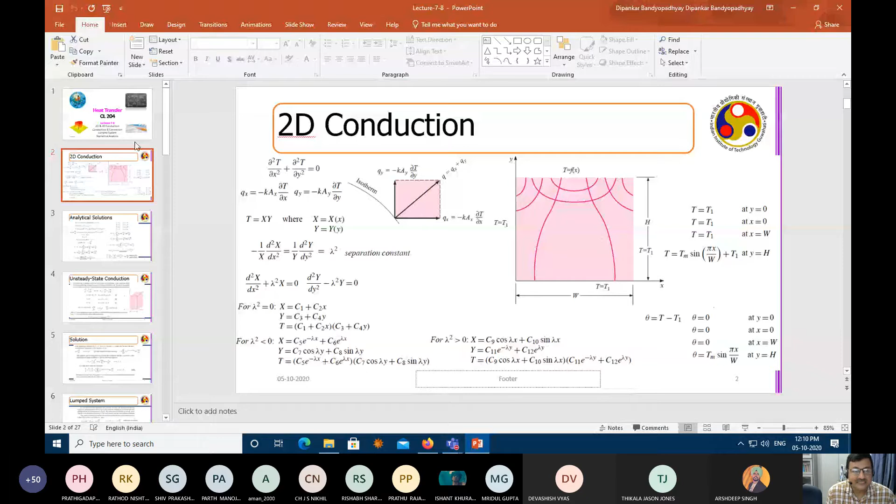Great. So let us start today's lecture. Let me recap the part, because this is a very tricky part of heat transfer. This is the way most of the heat transfer modeling started. You understand that if I'm really looking for an engineering problem, I need to first visualize the problem. Then I have to mold it towards a mathematical model. Then I have to solve that mathematical model, in the forms of equations and unknowns. And then when I'm able to establish the unknowns, I will apply that knowledge for the engineering calculations.

Okay. So what is this problem? You have a slab, and this is a kind of 2D conduction slab. Say suppose there is a heat transfer taking place through this slab. What is the condition that we have applied? This is the width of the slab, this is the height of the slab. The temperature here is T1, the temperature here is T1, the temperature here is T1. But here the temperature is a function of x. This type of system happens in many situations.

Like, say, suppose you have a microprocessor here. When the computer is turned off, the temperature of the microprocessor is at room temperature. But when it is doing a very simple calculation, the temperature is a little more. When it is doing a very heavy calculation, maybe the temperature is exponentially going up. So I say that the temperature at this place is a function of something like this, which is a function of x in this direction.

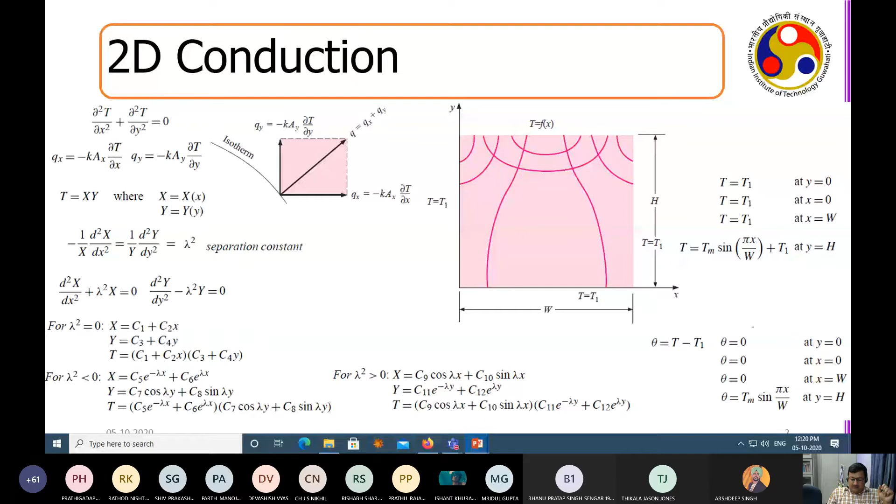Boundary conditions are associated with this particular situation, and then I try to get an analytical solution with certain assumptions. This is the entire framework of heat transfer that we are operating with. Now, this is for steady 2D conduction. These steps we have already discussed. This is the way you evaluate the constants; just go through this. These are all simple algebra done to evaluate all the different types of constants, and I have already described this.

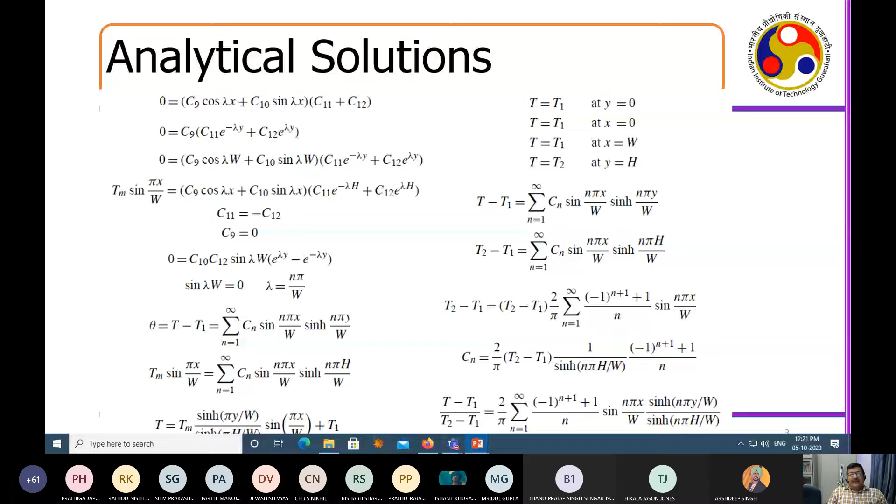Now, the second problem that we take: suppose you have a slab like this, but this slab is losing or gaining temperature with respect to time. Suppose I have heated this wall, or suppose there is a reaction happening inside this, some sort of heat is being conducted through this medium. And that is not a steady situation. So what do you expect? Then the transient term will come, right?

So the conduction taking place through this has a variation with respect to time, and I end up getting a parabolic equation like this. And as we have defined, theta can be T minus T1, which is the driving force. If I put it into this equation, I get this in terms of theta. So theta equals theta i, the temperature in the beginning, at time t equal to 0, from x equal to 0 to 2L.

What is the dimension of this equation? This is one-dimensional in space and one-dimensional in time. What is the order of this equation? This is second order in space and first order in time, a partial differential equation.

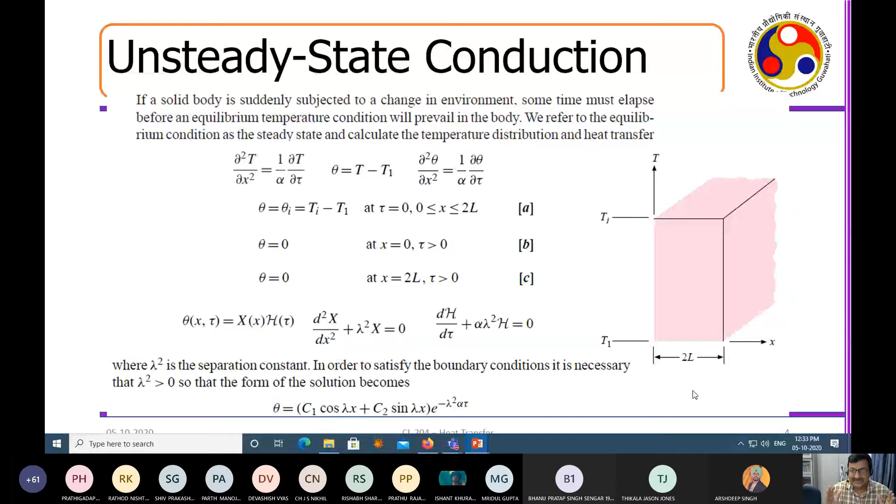Now what is L? What is alpha? Alpha is the thermal diffusivity. We have defined it as K by rho Cp. That means how much is conducted and how much is held. And what is L? L is the characteristic dimension of the material. Here, what is 2L? 2L is the length. From there the L is coming, right? So L is a signature of the thickness of the plate, finiteness of the plate.

Now, if you divide alpha tau by L square, that gives you a dimensionless parameter, and we are going to discuss it more as we progress. So you can see that we are trying to define the temperature profile in terms of a few dimensionless numbers, and then later on we'll try to plot in different situations to see the consequence of that.

Great. Now we define this problem we did during the tutorial. Say suppose I have taken an arbitrary material and I know that this is a metal. Suppose I have heated it up to a very high temperature. This picture I could not draw that day. I'm planning to draw it now, because this is a very important concept that you need to remember.

So my PowerPoint slide is visible to everybody. Am I correct? Yes, sir. Thank you.

Say suppose you have a ball like this, and this is a metal ball. And say suppose I have immersed this metal ball into water. So this is my water. And this metal ball has a very high temperature, say 350 degrees centigrade. So when I immerse the metal ball into water, how fast am I able to lose the heat?

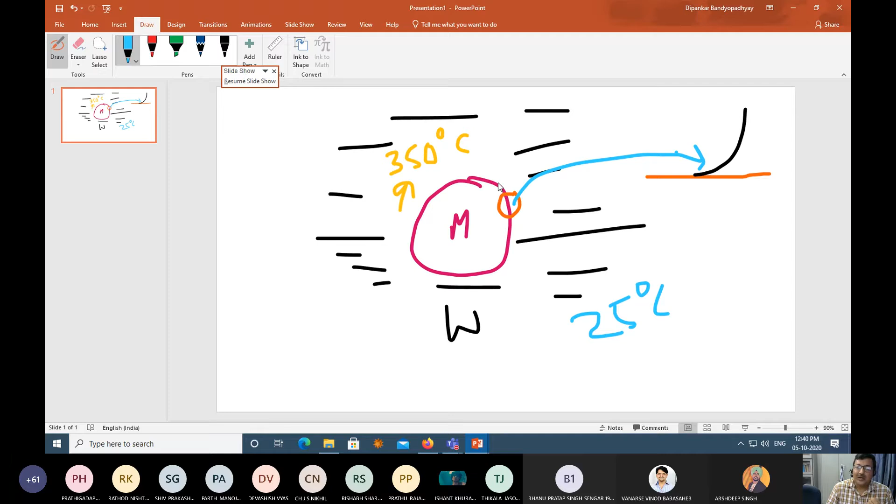Now the moment I immerse it at time t equal to 0, what happens? There is a capacity of this metal ball to hold the heat, which is related to the heat capacity of the system. Whereas this metal also has capacity to dissipate the heat through this temperature gradient and through this convective flow. So two simultaneous things are taking place.

Through this loop, the energy is getting dissipated, which is the loop of the resistance, and resistance we know is 1 by HA. And through this loop, the energy is being stored, the heat capacity of a material. Why does water have such a high heat capacity? Because it can really keep the heat with itself. The molecular architecture is such that if you put energy into it, it is capable of retaining that energy, which is not the case for an alcohol.

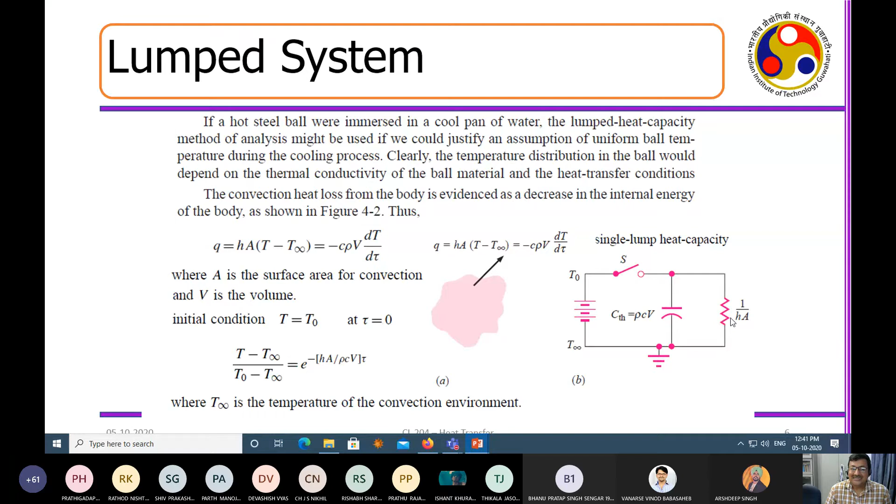So you can see straight away this HA by rho CV can be divided into two parts. The rho CV part is the capacitance, whereas 1 by HA is the resistance. So HA by rho CV can be interpreted as 1 by resistance times capacitance, where resistance is 1 by HA and capacitance is rho CV.

So this is a very interesting heat transfer system, very much equivalent to an electrical or electronic system, where you also get similar time constants in an electrical flow: the capacitance to the resistance. The ratio of these two gives you the time constant, the characteristic time. Capacity means how much electron I can hold. Resistance, or conductance, means how quickly I can dissipate the electron.

So 1 by resistance means conductance, by the capacitance. That ratio gives you the typical time. What is the physical significance of this time? The physical significance of this time is how quickly this energy is going to get dissipated.

So this is what? This is resisting. This part is resisting towards dissipation, whereas this part is facilitating towards the dissipation. And tau is what? Tau is equal to C rho V by HA. Okay, which is the opposite of which is. See, this is time, which is second. HA by rho CV should be second inverse. So tau will be C rho V divided by HA.

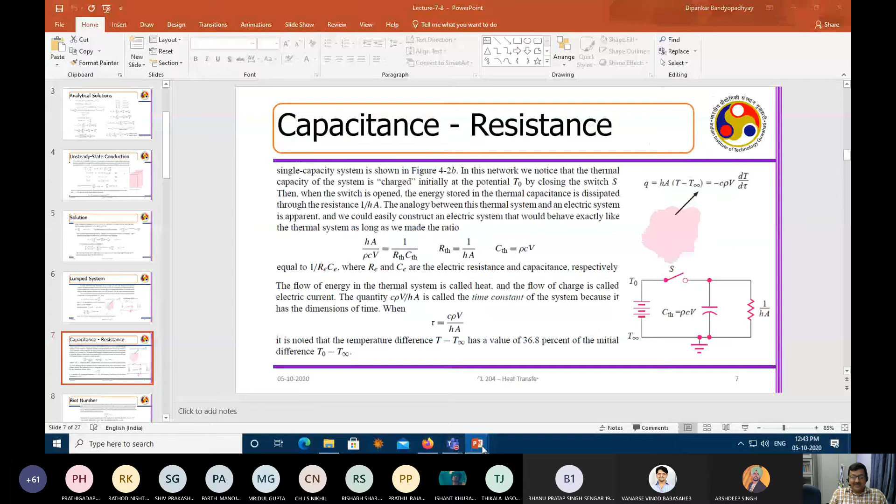Now let us look into this. What is rho CV? Rho is mass per unit volume. C is the capacitance, and this is volume. So mass into capacitance per unit mass. So this is essentially the capacitance of this object. And let us look at what is resistance. We have looked into this HA parameter a lot. This is nothing but K by delta A. So K by delta A is what? K by delta A is associated with delta, the boundary layer thickness, the thickness of this boundary layer.

And then you have H is equal to K by delta into A. A is the what? A is the area. Through this area, through this surface, this energy is getting dissipated through these convection currents. There is a time associated with that. Some amount of heat that is coming because of the temperature gradient is getting dissipated through that. This particular time scale has been decided by tau.

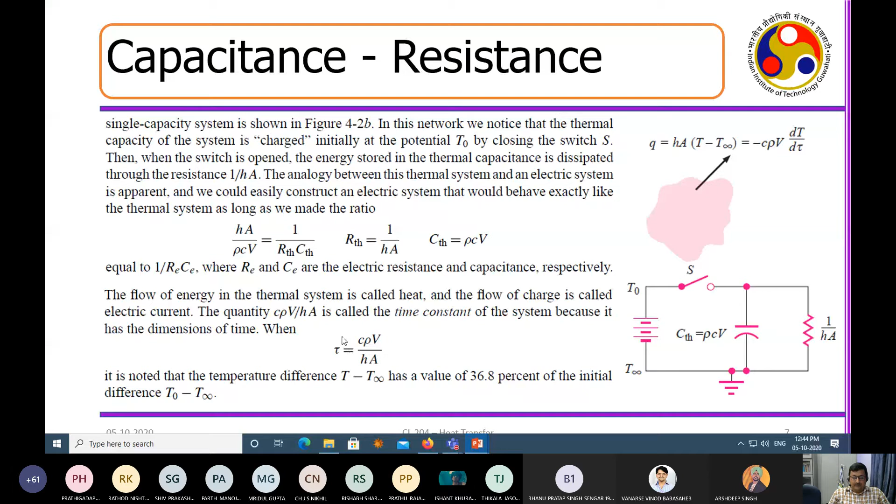Okay, and from there we could give the concept of the Biot number, which says that we put up a dimensionless quantity, which is H V by A by K. This we define as another dimensionless quantity, which is called the Biot number. What is this Biot number? H is the heat transfer coefficient. V by A is a very interesting parameter that is called the surface to volume ratio. This is a very, very interesting parameter in terms of what? In terms of everything.

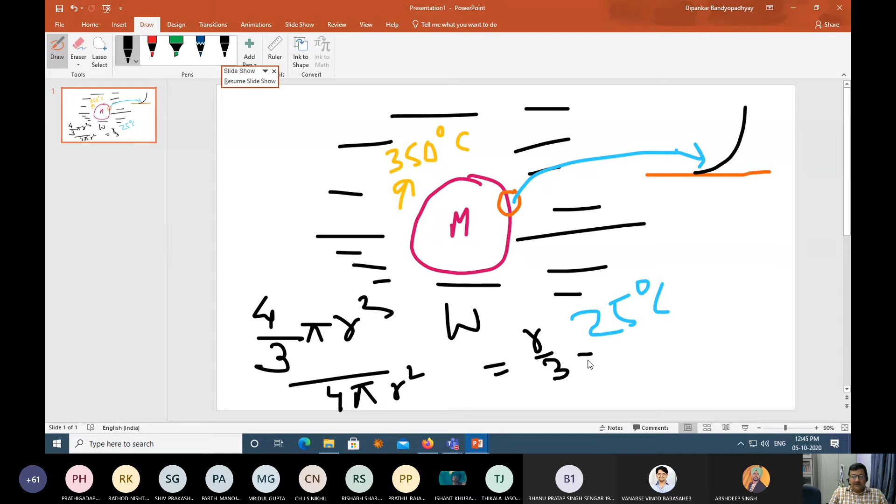So suppose I think about a sphere, right? What will be my V by A? I know that 4 by 3 pi r cube is my V divided by what will be my area? 4 pi r square, right? So what will be my V by A? V by A will be equal to R by 3. This will be equal to my V by A for a sphere. So you can see that volume to area is a function of R.

Or if I just do the other way around, suppose surface to volume ratio, which is A by V, which is equivalent to, I can write that 3 by R. So that means if I reduce R, what is going to happen? This parameter is going to increase significantly.

When you take coal and when you try to create thermal power, what you do? You first take the coal and then you pulverize. When you take big chunks of coal, when you take briquette, when you try to cook up a chula, what you do? You try to break the briquettes or the bigger coal particles into smaller ones before you make the chula. Why don't you burn the big particle? Because it has a very low area to volume ratio. This is called the surface to volume ratio. Bigger particles will always have less surface to volume ratio. It's actually decided by this.

Smaller particles, as you keep reducing it, per unit volume will have more surface, which is called the inverse of the characteristic length, and V by A is called the characteristic length for any geometry. What does it mean? How much volume do you have per unit surface area? More surface area means more convective heat transfer. More volume means more heat capacity. The ratio of these two gives you the characteristic length.

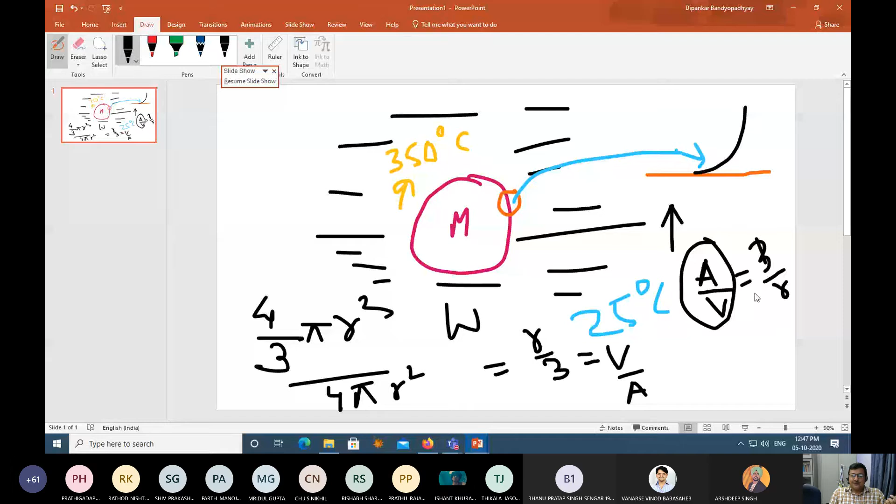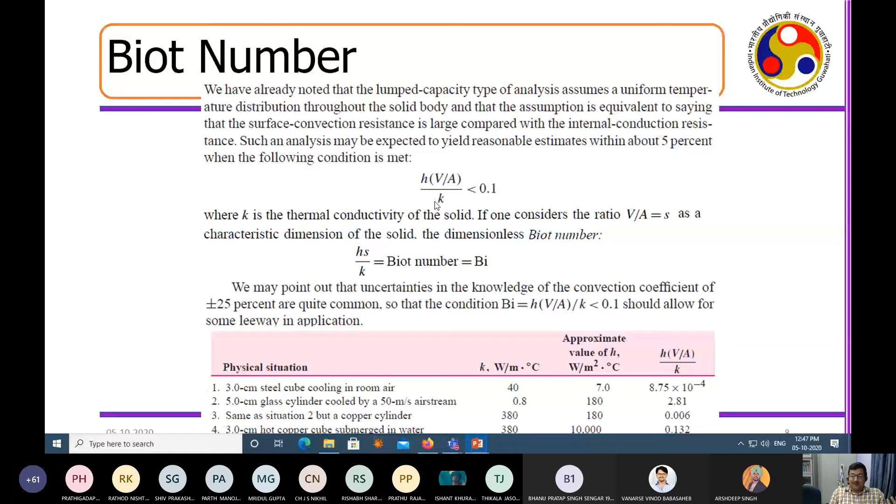Now if you multiply this characteristic length with H, this gives you the extent of convective heat transfer through the boundary, whereas K gives you the amount of conduction that is happening inside the system. And if this is less than 0.1, that is typically a lumped capacity type, which we have done a lot of problems on in the tutorial. Great. Let us move on with this.

So we have now understood three different types of dimensionless quantities. One is the dimensionless temperature. Then we have the dimensionless time and dimensionless length, alpha tau by L square. This can be dimensionless time. This can also be used as dimensionless length. As we progress, you will see.

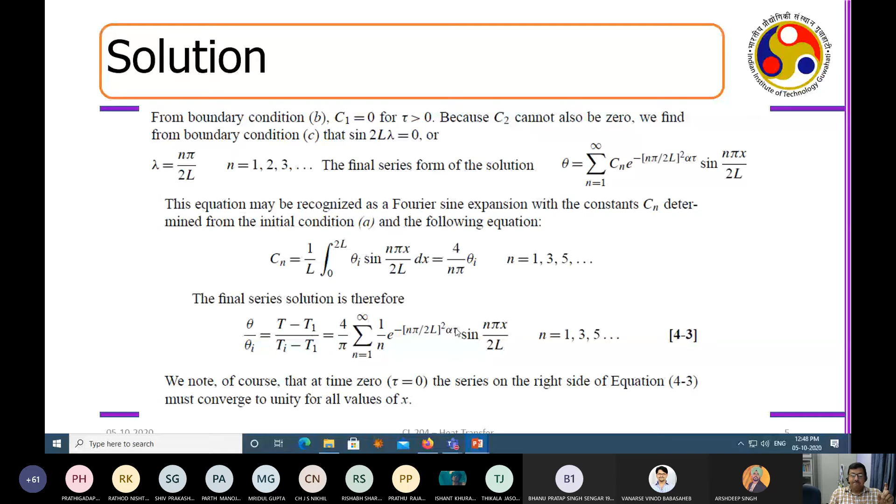So you can make use of these things for, say, transient flow in a semi-infinite solid. What is the equation? Let us look at it bluntly: del square T by del x square equals 1 by alpha del T by del tau. Temperature is T1. Here the temperature can be T0, or it can be a heat flux boundary condition. In that, we now enforce these two boundary conditions.

T at x and 0, where 0 means time. At any point x and 0, it is Ti. So the initial temperature is Ti, and T at 0 and tau. So I have just changed the boundary condition, and you can see the solution has changed. Now when I look at this solution, I do a plot. I just demagnify it a little because the x-axis is not visible.

Now you can see that I go for a plot of a dimensionless temperature, and then this parameter. What is alpha tau? Alpha is meter square per second, tau is second, so this is meter square. Root over meter square is meter. Meter by meter. So you can see that x by 2 root alpha tau gives me a dimensionless length.

If I think about tau, this also gives me a dimensionless time: 4 tau alpha by x square gives me the dimensionless time. So these are the dimensionless lengths. As I progress from here to here, what is going to happen? The driving force is going to reduce. So what does it mean?

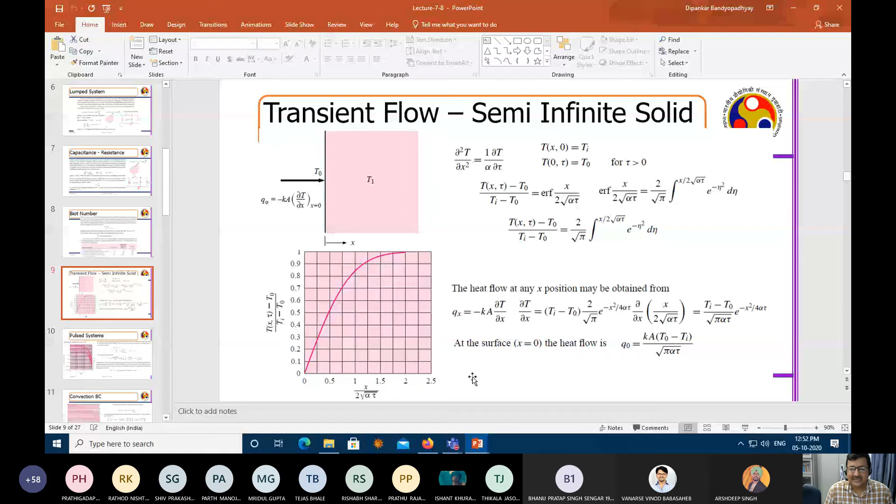If you change the boundary condition of the previous equation into this, you end up getting a solution. You need not calculate these things because these are all standard solutions in terms of the error function; you just need to remember which condition gives what. You can see how, for different times, the dimensionless temperature changes with x square by 4 alpha tau. If you square this variable, you get x square by 4 alpha tau. And here you may see that this is expressed now.

This is not expressed in terms of only temperature, but in terms of heat flux by Q0. So this is total. In the top you have the heat flux, and here you have the bottom. So this is a dimensionless temperature, and this one is called the dimensionless heat flux. So different temperature heat transfer mechanisms are considered in the plots, where you have every information embedded.

T is the present temperature, Ti is the initial temperature, A is the cross-sectional area, rho is the density, C is the capacity. Alpha is the thermal diffusivity, Q0 is the initial condition associated with the heat, joule per meter square. Q0 by A is the instantaneous surface pulse, x is the length at which it is happening, and tau is after what time.

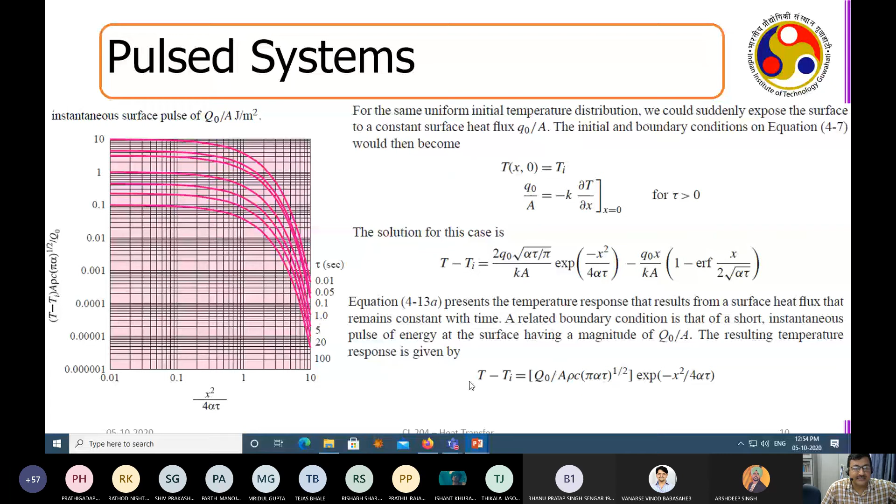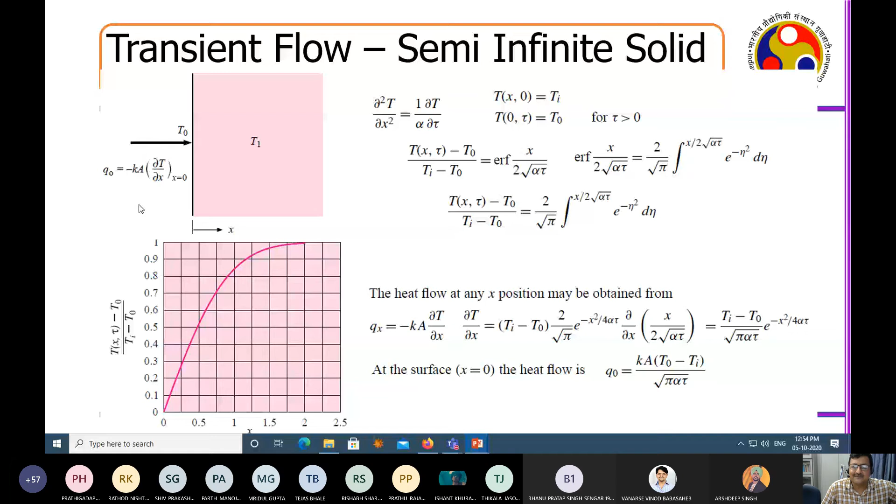Now you can also change the boundary condition here. You put the heat flux Q0 as the heat flux condition. You can also say this heat flux is equivalent to a boundary layer at this place, and the heat is getting dissipated with this boundary layer in terms of convection. You just change the boundary condition like that, and you end up getting a complicated equation like this. This has been derived long back and has been in the literature for a while.

These days we don't solve these problems like this. These case studies give us the basis for the way we do numerical analysis today, and these are validation cases obtained using different analytical methods. So you can see straight away 3 solutions. One solution is like this. If I change the boundary condition a little bit, it is like this. Again I change the boundary condition, it will give me a solution like this, and that again I can embed.

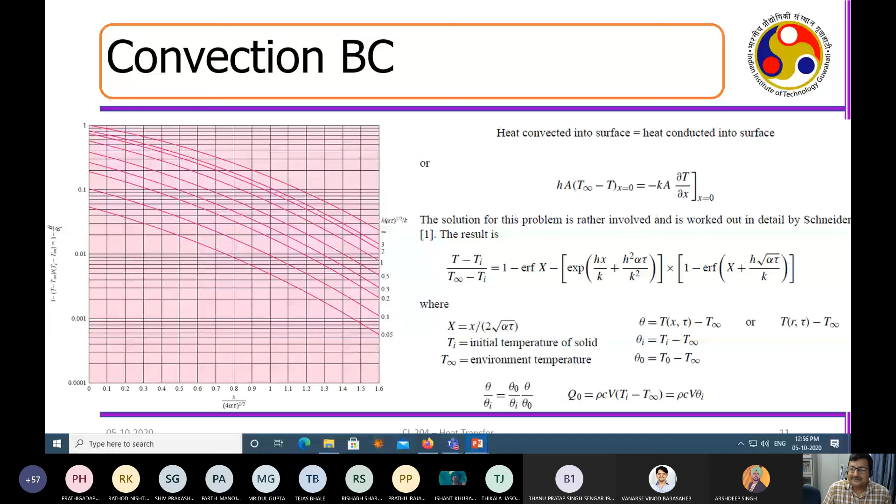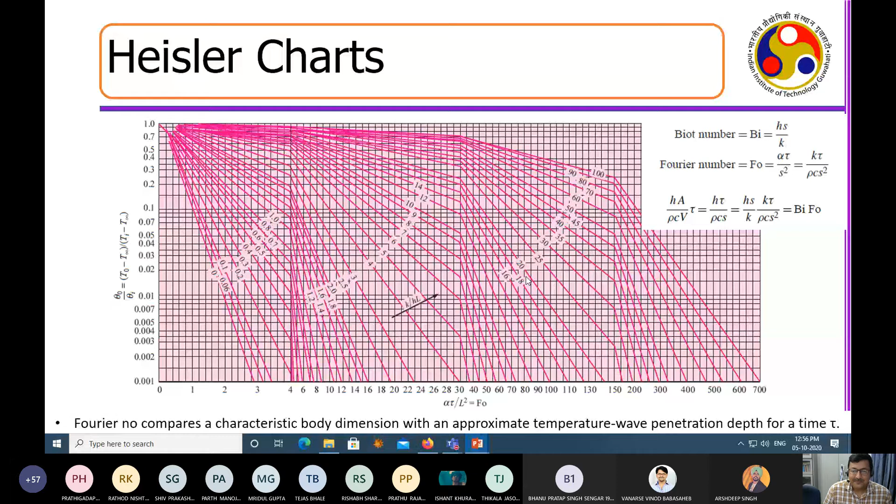About these Heisler charts a little bit more, just to give you the hint: we are expecting to plot the dimensionless temperature with respect to the time or length scale. This is defined by the Fourier number, which compares the characteristic body dimension with an approximate temperature wave penetration depth at a time tau. So, to conclude this lecture, the Fourier number is defined as alpha tau by s square.

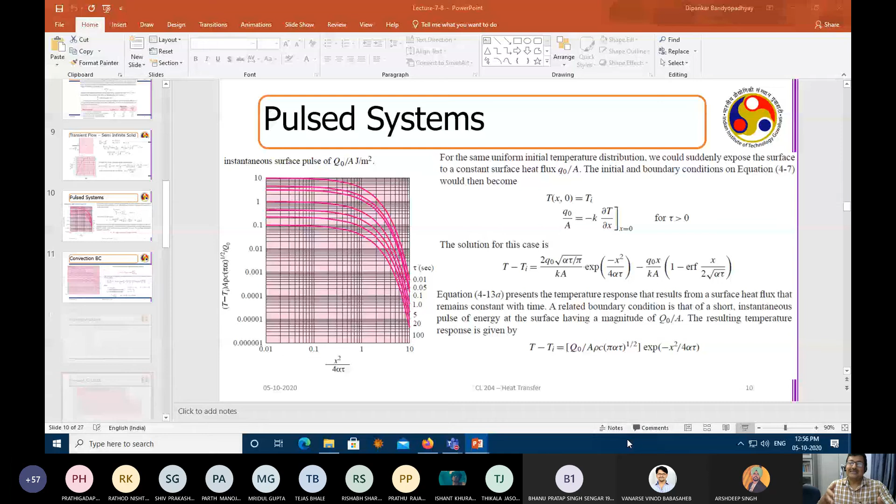What is s? S is equal to V by A. Alpha is the thermal diffusivity, meter square per second, so meter square divided by meter square. What does it say? For a given time, how much the temperature wave has penetrated into the system against the characteristic dimension. This is defined by the Fourier number.

And what is Biot number? Biot number tells us how much is conducted and how much is convected with respect to the surface to volume ratio for a given time.

Because, as I have showed, this S can also be written as root over of alpha tau. So later on, as you will see, when we will introduce the Nusselt number, you will find that this will become the characteristic dimension, which will give you the extent of convection to the extent of conduction. Please don't confuse between Biot number and Nusselt number.

They look very similar. Biot number has to do with, say, suppose you have a geometry, how quickly it is losing heat in a transient case, than how exactly it is retaining it. What are the modes of conduction and convection in a very short time? That is the physical significance of the Biot number. Whereas Nusselt number gives you, for a heat transfer process, how much is convected and how much is conducted, right? So that will come later.

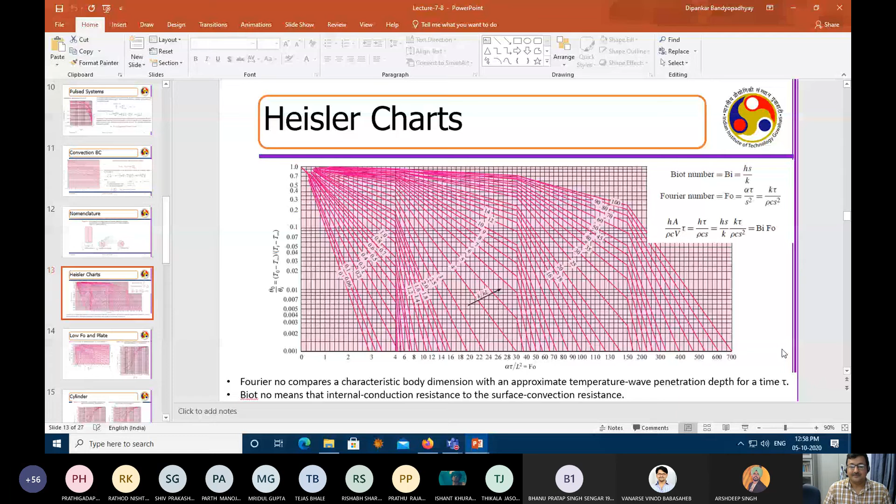But for the time being, you have to fix the matter associated with Biot and Fourier number, which we are going to discuss a little bit more in the next class before going for the numerical part. Okay, so if you have any question, you can ask. Do you have any question?

Sir? Yeah. I had a question, but not related to the chapters you have taught today. Please ask. Sir, we have 5 postulates and 4 laws in thermodynamics. So why do they coincide? Yes, because you have to understand, they have emerged over about 150 years. Initially people thought that these postulates were all independent, but as the subject progressed, people found out that many of the postulates were similar to the laws. Okay, so then they coincided with them.

So rather than 9, they become like 4 laws and 5 postulates with certain intersection points in between. And postulates are like hypotheses. Whenever you develop a law, you put forward a hypothesis first, and then you come up with a lot of experimental or theoretical evidences to establish the law, right? Like, say, you saw Kepler's law, and then you came to Newton's law of motion. Many of the Kepler's laws were found out later on to be Newton's law, but today you call them Newton's law.

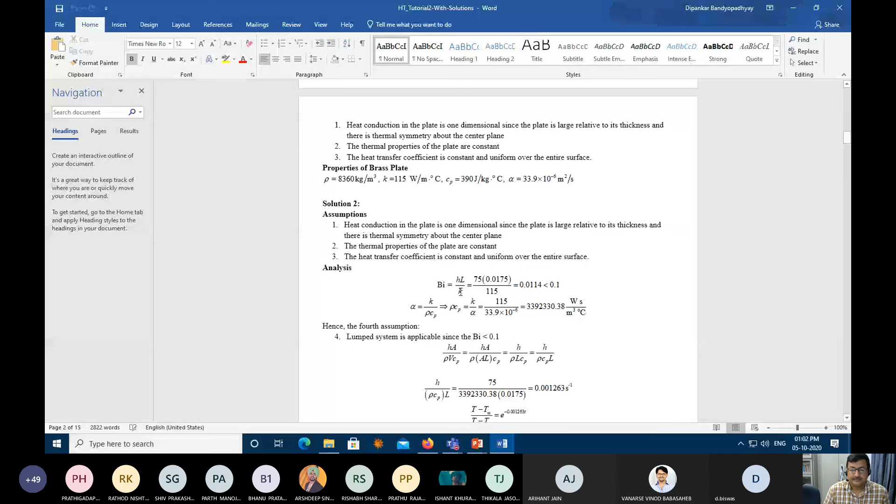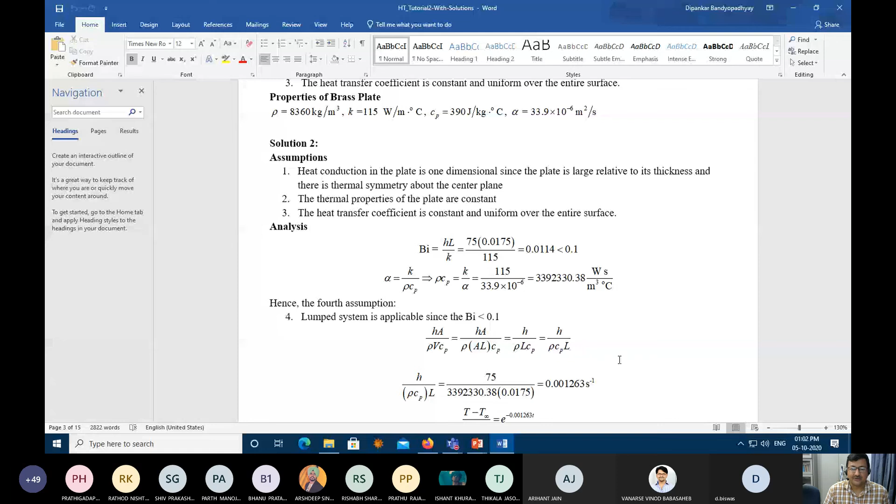Rho and Cp was given, but we have used the formula alpha is equal to K by rho C. Alpha is equal to K by rho Cp, no? That is the case, yes, sir. What is the problem? But we have given rho and Cp. Why have we not multiplied rho and Cp directly? You can do that. See, the way I do, you may do a different way. Ultimately, what matters is whether you get the right answer. Okay, sir. Okay, don't be very strict and stringent in your approach.

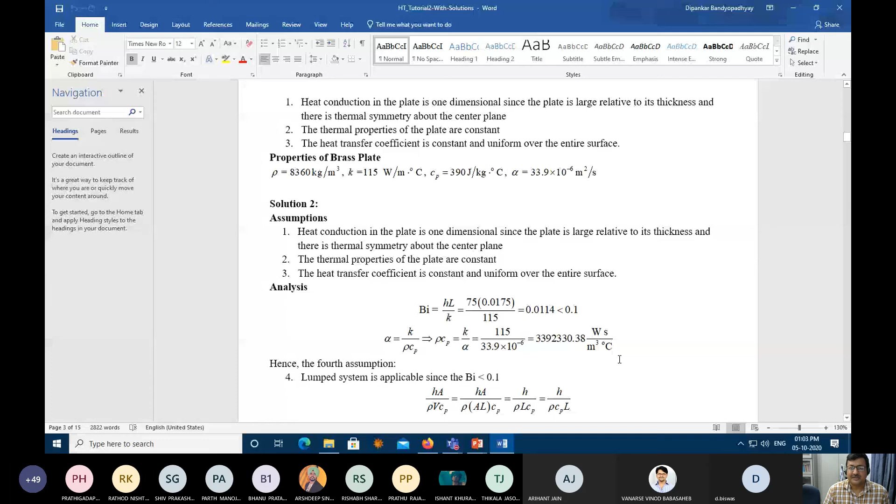Engineering is a place where you have to be very flexible, very flexible. Okay. Anything else? No, sir. You should have your own way, and if you do it the right way, credit will be given. Don't worry about that. I'm not strict in terms of the way I'm teaching you to do it. You should actually try to do something else. Solutions are given to give you the hint that this is the way it can be done. This is one of the solutions. If you can find your own way, I'll be the happiest person on the globe.

Okay. Anything else? Any other question? I can see one comment is there, sir. We have to write equations and present on the screen, or we have to do it verbally? This is Priyanshu, right? This is related to the quiz you are asking. Tell me the concept verbally, because I don't believe too much in writing and all. If you have understood the whole thing, the purpose is solved. If you have learned heat transfer, the purpose is solved. It is not about whether you are able to solve.

All of you are good in equations, unknowns, boundary conditions. That is accepted. That's why you have cracked JEE. So none of us are testing you on that anymore. The question is whether you have understood the engineering concept of heat transfer or not, whether you have done it by yourself or not. That is the check that we are making here. So the purpose of the quiz will be to check only whether you have gone through the lecture notes, whether you are following the lecture notes or not.